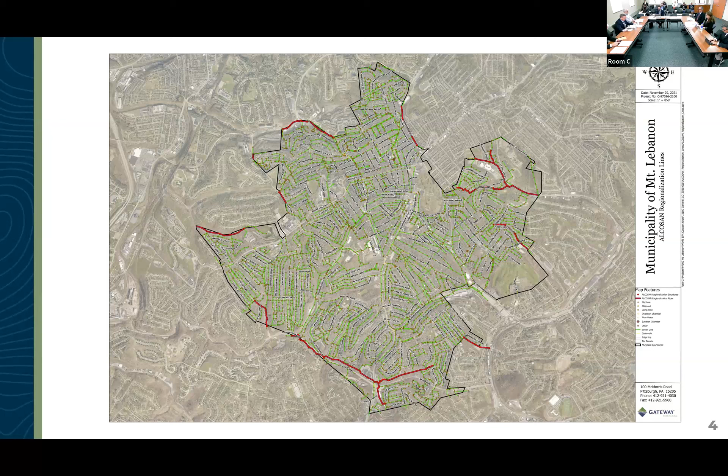So as part of the process in 2018, Alcosan performed televising of all those lines that were proposed to be transferred. At that time, they identified a number of action items to be considered for repair or to be looked at further based on their CCTV contract, in addition to what Mount Lebanon has done typically as part of their consent order and operation and maintenance plan.

Of those roughly 43 action items, there were some we were taking care of as part of operation and maintenance, and others we identified as potentially considering a different repair for. At that time, it wasn't understood whether the municipality, not just Mount Lebanon but others, would consider regionalization. So we held off on some of those repairs or remediations.

Not only that, with most of these sewers being municipal in nature, a number of these repairs or defects considered multi-municipal sewers or remote areas where it was difficult to get to. Throughout the time, Alcosan had indicated different potential repair contracts, which we evaluated versus our own contracts within Mount Lebanon, but never deemed those any more cost effective than Mount Lebanon's.

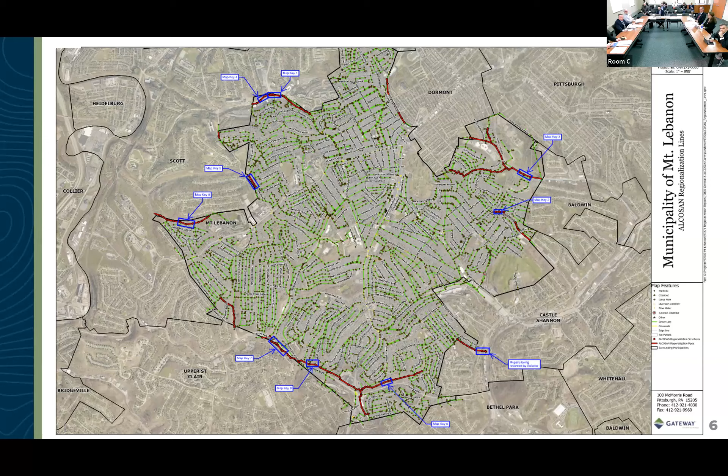So going over what has been done in the meantime, after those repairs were identified, for the most part it was evaluated how they could be incorporated within the contracts that Mount Lebanon already had for their operation and maintenance repairs. Those were developed, prepared, and provided to the contractor.

As you can see here, there's a breakdown with a number of structural repairs. Those are just the excavation repairs, and a number of spot liners or smaller liners within the system. There were some that just required cleaning and re-televising so that the data could be updated. Some were incorporated within the root treatment contract.

The manhole to manhole lining or cured-in-place lining contract, which Mount Lebanon has done a great job of, lining a significant portion of the system anyway. So it was identified that was a good potential repair to consider. And then lastly, the external point repairs, which are oftentimes even just repairs of structures.

Some of those actually remediated multiple defects that were considered. With that, mapping for each repair, cost estimates were developed for each one.

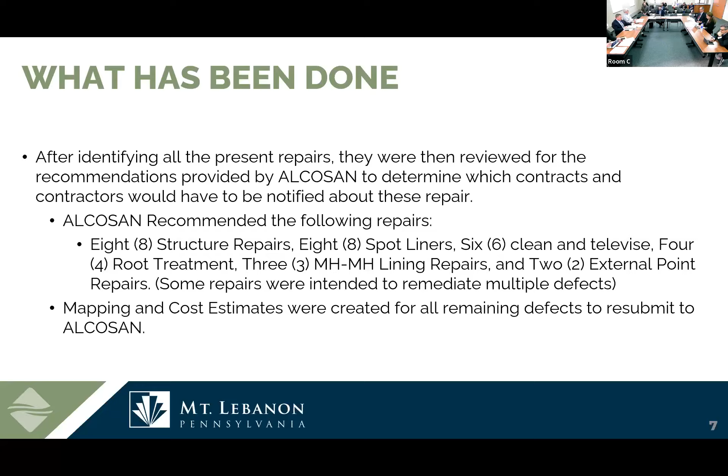As repairs were made, there was a process of resubmitting to Alcosan for consideration to have those removed from the list. The data submissions were coordinated with Alcosan. Of the initial 43, the majority have been repaired and approved by Alcosan.

As I stated, they are on active contracts, some of which Mount Lebanon has done quite a bit on. So there was a lot on those contracts, and some of them have extended over multiple years as well.

And then there were some outstanding defects found due to extenuating circumstances. As I stated earlier, one situation was in a very remote area where access was very difficult and the depth of the repair was extremely difficult. So that was one instance.

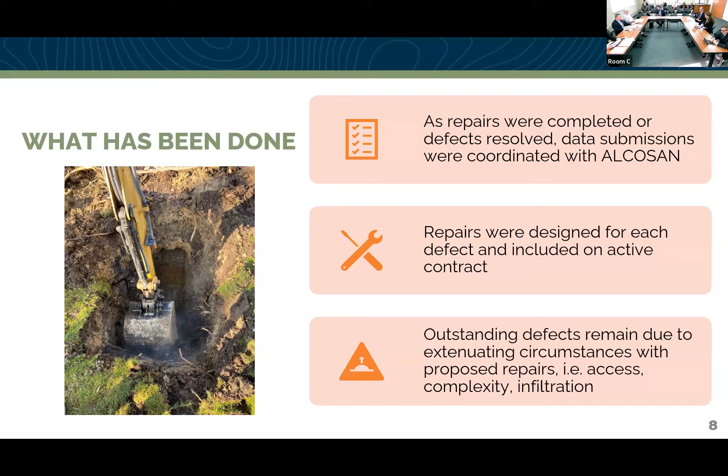Another instance was additional water coming into the line, ones that run right along streams. So there was just some additional complexity to some of these repairs.

Currently, there are approximately 14 defects or items that have been called out that are still outstanding as part of the contract. With that, Alcosan, as they've been pushing to get this accomplished a little more quickly, did include a post-closing repair and reimbursement agreement, or the PCRARA, which is a bit of a mouthful.

But it's just another way to proceed with this, as a number of municipalities have run into the same situation where repairs are either very difficult to get to or very difficult to repair. So they wanted to find a way to make agreements before these repairs were completed. In this case, and it sounded almost too good to be true as we worked back and forth with Alcosan on it, they stated that all we had to do was develop a cost estimate for each one of these outstanding repairs and provide that to them with backup information as to where that estimate came from.

And with that, it would just be a part of your final agreement that you would sign that would include those repairs. Ultimately, Mount Lebanon would just write a check for whatever that amount was, as opposed to chasing some of these repairs.

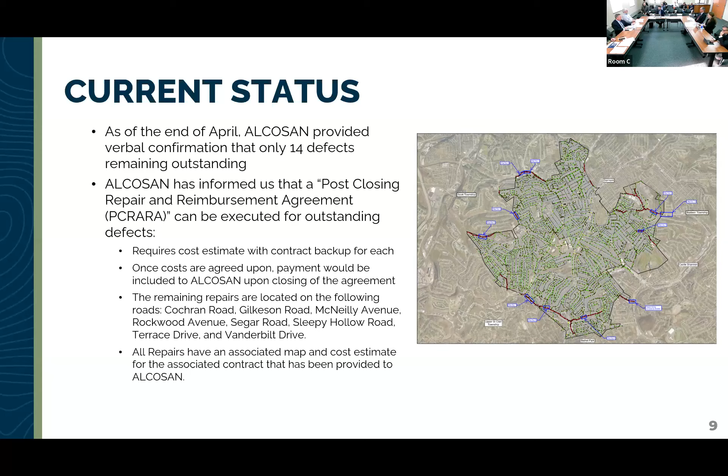So with that, the 4 active contracts we've used in order to identify those cost estimates.

I'm sorry, just to make sure - so we could write a check to Alcosan, and in theory they could say no, we're not gonna fix that? Right, we write the check. They've said this would cost to fix it. Yeah, thanks - left pocket, that's where the money goes.

Or the other option we were led to believe prior to them incorporating that, was just that we had to go and chase that repair. For instance, there's one defect under McNeilly - a defect 10 feet in from one manhole and another 10 feet in from another manhole. It's expected there's probably going to be other defects in between. It's about a 400-foot long line. Altogether, that could be potentially hundreds of thousands of dollars of repair, versus if we just repair the 2 they've identified, or provide a cost estimate for the 2 identified - it's more like a $10,000 to $15,000 cost in that case.

So those are the 2 options we have if you were to move forward - either make the repairs and chase those, or write the check and do it as part of the post-closing agreement. There's also some others where, like I said, some are just listed as to clean and re-televise.

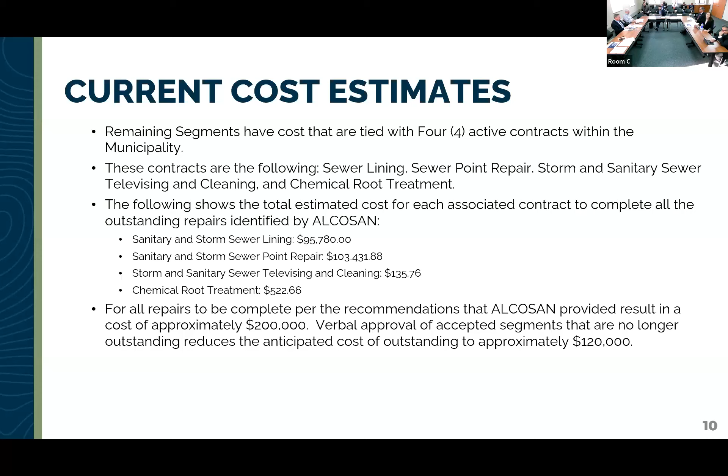Even since this was produced, I was trying not to change it too much from when I had sent it along, but it appears that number may have come down even further. We've had some discussions with Alcosan to work towards that, and they won't make any final approval or recommendations until the resolution has been passed.

That leads us into the next steps of the process. I've focused this discussion on what we've been doing for those repairs, and that's one of the main items considered along the way. But there are a series of agreements. As I stated, there were 7 points of connection, so there are seven separate agreements that would need to be made. I'll get into some of the details as to what goes into those agreements and what's required to start that process. The first of which is to execute a resolution.

They initially wanted 7 separate resolutions, and Keith had coordinated with them, and they said we could combine those all into one. That would be expected for consideration in June, right Keith? That's the current plan, yeah.

With that, once they receive that resolution, the process would start where they'd begin evaluating the permits, because they have to do a permit transfer if you go that route. They would start evaluating the easement, so there's an easement coordination that would be in there as well.

And so when it comes time for a commission to vote, you'd mentioned there's verbal... is there some number, you know, we're voting on these 7 resolutions combined into one — is there a max exposure to Mount Lebanon? Within the resolution, there's nothing that would tie you to that number one way or another. The resolution, as they stated — I think I have it here. I guess what I'm looking for is, before we vote, we should have an idea of the capped cost number.

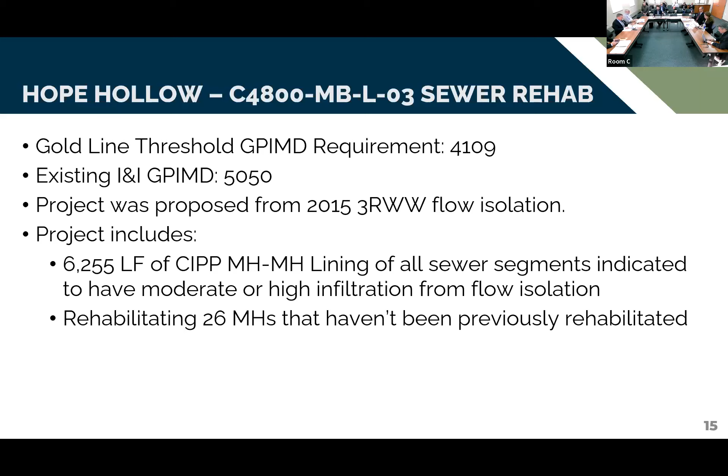I'll spare you some of the details, but essentially about this first one in the Hope Hollow area, we are currently well over the gold line standard. We're at 5,050, and that's just because of the denseness of that area. We would propose about 6,000 lineal feet of lining, 26 manholes.

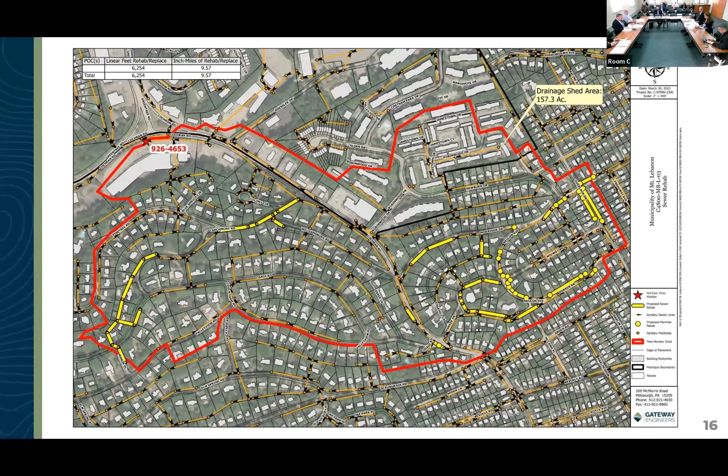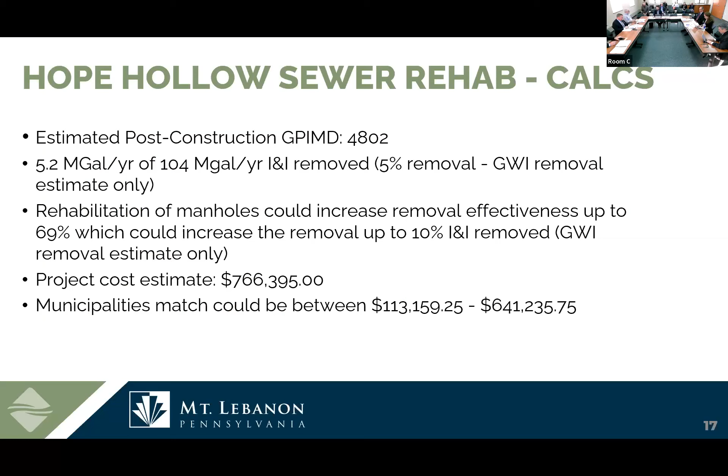Another photo showing the region and the proposed lining area extents. Ultimately, in just preliminary calculations, at the very least a 5% removal, but with the manhole repairs we're expecting that to be somewhere right around the 10% I&I removal required by the order. The total project is estimated around 800,000, with that wide range of costs.

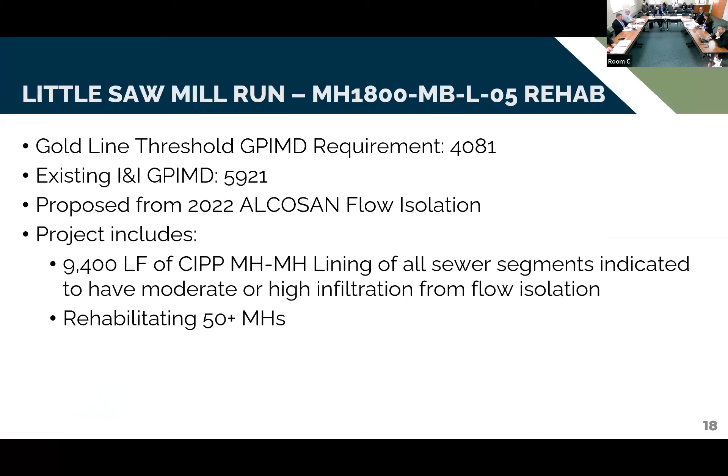The other area is Little Sawmill Run. That one, as of right now, is a larger lining project, about 9,400 lineal feet of lining with approximately 50 manholes rehabilitated within that.

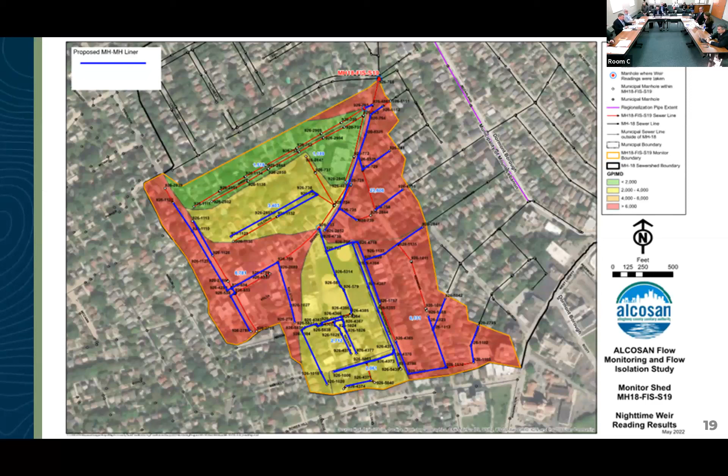Map showing the previous study that had been completed to identify areas to be considered. That would get us right around to that 9%, or once we complete our final calculations, we would hope to reach that 10% removal that's required by the order.

Commissioner, any questions? So following that trunk transfer, portions of it are part of an ordinance. So we're still required to comply with the consent order, even though it would be transferring. So those are lateral lines, that's the lateral part, but there is a portion of that that's part of the transfer. Yes, there are a few different portions actually that would be covered with the transfer.

I think both these projects are ones we would do anyway, right? Dennis recommended, yeah, for our gold line standard. So they're good projects because we could potentially get grant money to comply with the order, meeting the gold line standard. We've been pushing toward essentially manhole to manhole lining as much of the system as we can, to get the 70 to 100-year-old system up to date. These are projects you would recommend anyway to bring us in compliance with consent order requirements. This is just an opportunity to get some funds to offset the costs.

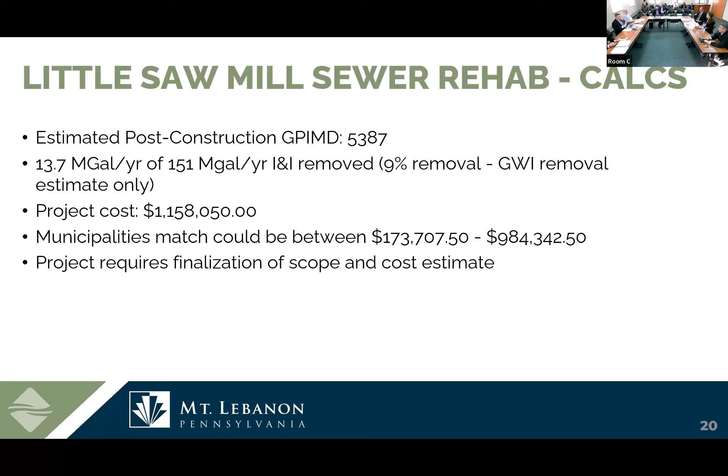We're a little bit ahead of schedule still in identifying some of these, so trying to take that bite of the apple before everybody else is chomping at it. Any other questions? So we are ahead of schedule. But thank you, we appreciate it, Dennis.

As we continue Gateway Engineers night, next is Cedar Boulevard, Salem, Hollycrest intersection, and Mike Haberman is joining us.

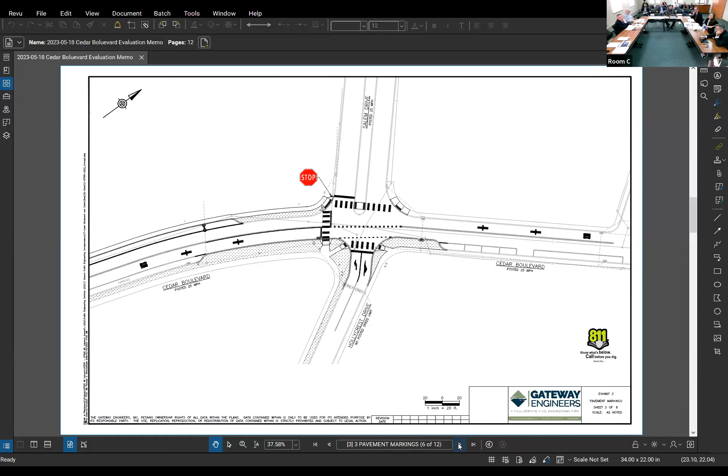The potential improvements build upon each other. This first one shows the narrowing of Cedar Boulevard with curb lines to minimize the length of the crossing, and bringing the Hollycrest approach up at more of a 90-degree angle to define things a bit more. This superimposes the new markings on that scenario with the new curb bump outs. The final build on top would be to install RRFBs - push button powered rapid flashing lights actuated when a pedestrian is going to cross Cedar Boulevard at that intersection. That's all what we talked about last time.

Yeah, what about more of this? What about that? So we're gonna talk about it a little bit. Just to touch on the first one - the next exhibit asks if there's something that can be done in the short term, temporary but could be permanent, requiring maintenance over time, to create that same situation without the massive infrastructure. Something cheaper and faster that we can do soon. Exactly.

This exhibit shows creating that exact same situation - the bump out areas where you already can't park, getting the 90-degree angle on Hollycrest, enhanced pavement markings leading up to the intersection with legends on the road, tracers through the middle of the intersection, yield lines at the crosswalk. So it's all pavement markings, all lines, no moving concrete, no curb cuts, and no physical barriers. It's all visual pavement marking.

But I thought you said it also included maybe some physical bump outs. That was the other one, the first one. This is doing the same thing simply through pavement markings - the temporary one is just like a stopgap. So I saw the hash marks and thought that was physical. Yeah.

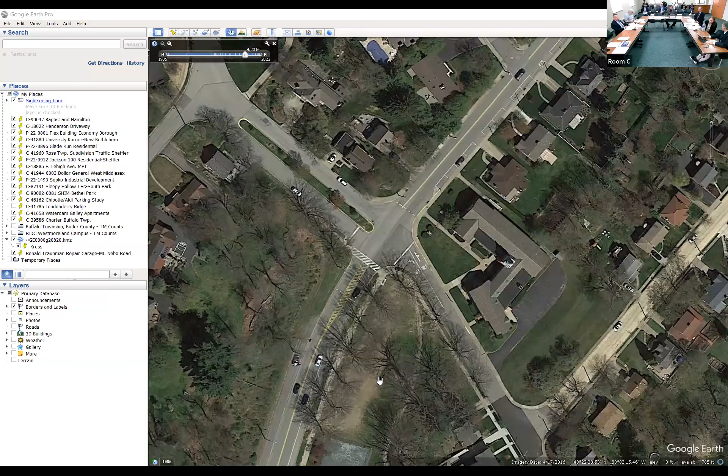This is the sidewalk network within the tennis complex. It peels off to these courts, goes north of those tennis courts, and comes back to some of the other courts. The exhibit shows where this sidewalk peels away from the existing sidewalk.

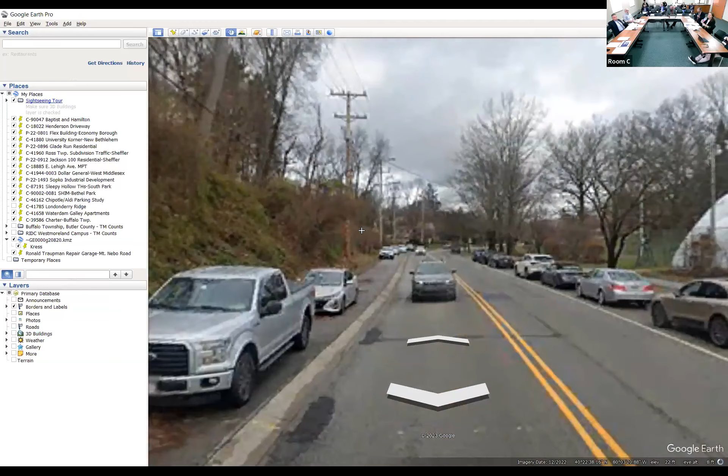If I were to drop myself in— go ahead, interrupt you for a second. Sorry, no, I just— it's okay, sorry. You show me something, we'll stop talking. If I pull up your street view.

This was put in presumably by the municipality. This is the location where asphalt was put in, probably because folks who were parking over on the asphalt parking lane were making their way here, since this connection provided access to all the different tennis courts within the complex.

So that is where the exhibit showing the mid-block crossing would be. Share that back again. You have two proposals: one at grade for 3,500, and if it's raised, 20,000. Yeah, it would essentially be an enhanced speed hump, but a speed table with a crosswalk on it, so you'd have the same ramps as a speed hump, but instead of just a parabola, it ramps up and has a plateau marked for the crosswalk.

So with crosswalk and speed hump, you did two options for that. Correct, this is the exact same exhibit. It would have the signs for the pedestrian crossing, and we would want to restrict parking.

You don't want parking 50 feet on each side, so that you have visibility if you're a car or a pedestrian about to cross. That's my only concern—safe visibility crossing between parked cars on both sides. You'd have to restrict parking for at least 50 feet. Yeah, that's essentially what we're doing there.

You lose how many spaces? You'd lose two on each side, so four.

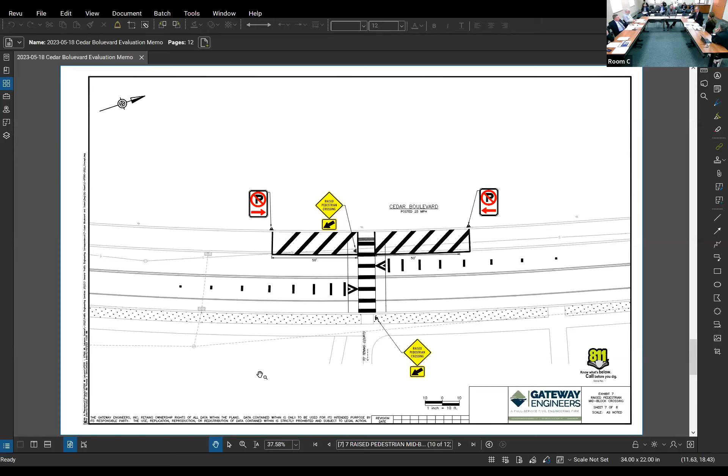Part of any crash history is looking at why the crash occurred. You have 3 rear-ends because somebody was on their phone - there's nothing you can do, the signal's not gonna change that. And then the volume thresholds aren't met either.

There's a 1-hour threshold, a 4-hour threshold, an 8-hour threshold - none of those are met. It's everything, every approach, every pedestrian, everything.

But last time we chatted, didn't you say that just the fact of having that crosswalk there actually increases the likelihood of an accident? It's not that it increases it - what the studies have shown is that a marked crosswalk can give the pedestrian a false sense of security, mid-block, if that makes sense.

It doesn't mean it doesn't make sense - like out here on Washington Road at the elementary school, that by all means is an absolutely necessary mid-block crossing. It makes sense where it is. It's been enhanced with a lot of the stuff we're talking about here, with signage and pavement marking and everything else. So the idea is if you are going to encourage people to cross a particular location, you want to make sure you mark it and sign it so that motorists and everybody else using the system are aware of it as they approach and go through it, as opposed to coming upon it and not really being sure what's happening. So all this is meant to enhance awareness for the pedestrian and the motorist, whatever option, if any, is pursued.

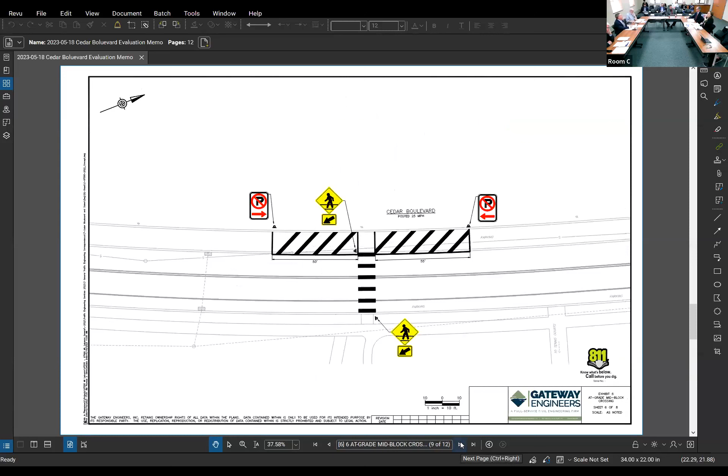I'd like to put that raised mid-block crossing in that same category, like the $20,000. Yeah, I don't mind having the cost of it and looking at it in the scope of the whole budget.

But just looking at where it is — I'm down there every night except when it rains, and games aren't canceled much on turf — I was hoping we could do something more significant mid-block to ease the speed coming into that intersection. It's a pretty good stretch, and even after that mid-block, where that extra stretch of concrete is, there's more than enough room for people to get up speed again, which they do.

By the time they get to that Salem Holly Crest intersection, you think they'll accelerate that quickly after going up to speed? I hope they're not gunning it that significantly. I'll just say, I go 25 miles an hour and people back up behind me.

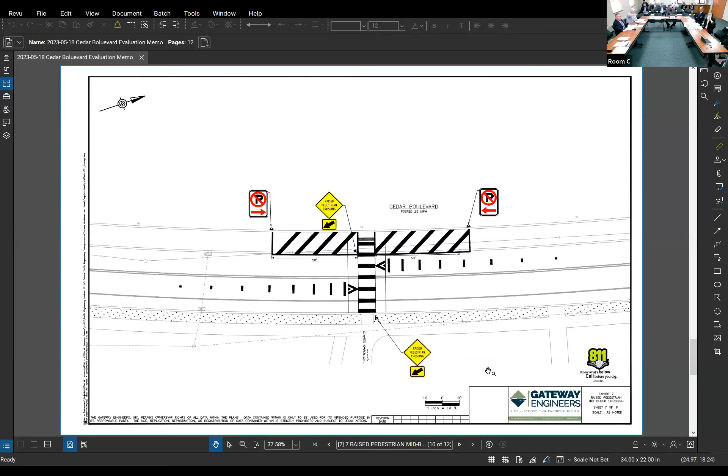Then we have... but coming the other way, what I'm saying is, to the point of, from this section here — can you go to the drawing, the one that has everything?

I was hoping it wasn't as much room looking on the map, Steve, but it is a good amount of room. So the distance — this line up here matches the line down at the bottom — so it's got a pretty good distance.

Mike, my other question is, how much do you actually think people would use a mid-block crosswalk there? Because if they're not parking proximate to that crosswalk, are they really going to walk all the way to it?

I think you'd have to turn it into a full-blown sidewalk on the other side, and make it obvious where you need to cross, because people are crossing all over the place now. That's why I'm asking the question — I don't know if this would change that behavior without the sidewalk.

I agree. I think you need that sidewalk to basically tell you when and where, and maybe even another light that would signal that you're crossing here. That's a lot of money, though.

It'd be cheaper to get the flashing light here — say $20,000 for the raised crossing and $50,000 for the flashing light — rather than almost $1 million for a sidewalk. I just don't think the cheaper version engenders the behavior change we're wanting.

I think we'd want to get a handle on how people are crossing now. My intuition is that wherever somebody parks, they get out of their car and cross, all over. That's what I'd think, because there's no sidewalk behind them, and you're not really going to walk — you'd have to walk up Cedar Boulevard in the lane of traffic to get to this location.

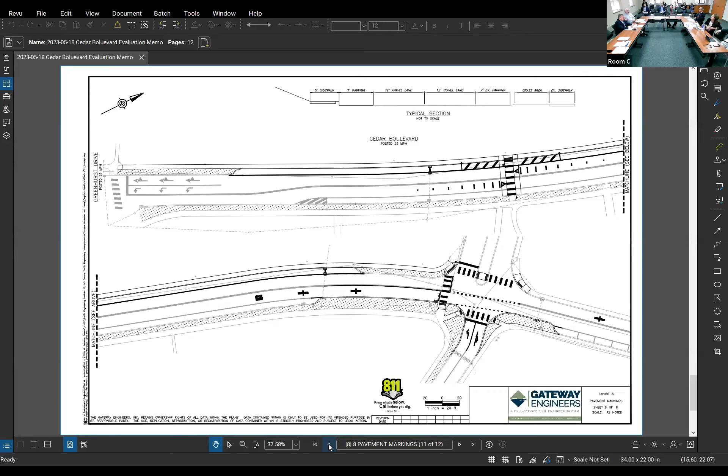So as far as direction for staff, yes, we want to come back to talking about unassigned funds, but clearly this seems to be pretty high up the list of something we want. So let's try to get that unassigned funds discussion quickly onto a future agenda so we get this project moving.

Yeah, after we talk we just want to put everything towards sidewalks, unassigned funds. I don't know if that'll fit on the 13th, it'll have to be in early July, but yes, let's bring that back for us to talk about.

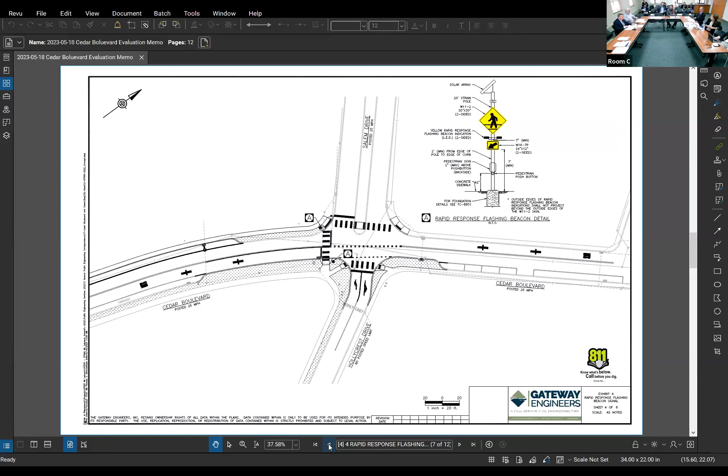We're short on time. Is there anything else on this subject right now? If not, I want to get to the next thing on the list. Cool with this? I think that's good to move forward. We'll hit it at unassigned funds and then maybe budget season if we don't get it through. That's what residents are gonna want to know. When are we gonna do it?

Well, I'll back to look at the discussion session, see when the unassigned fund meeting will occur. Don't have a date yet. We'll talk and figure out. We may have to move some stuff around for priority. We have a few things, and I know we've already committed to the sidewalk discussion on the 13th. So we'll see if it fits in there.

The second meeting in June, we're really gonna have to talk about the solid waste contract so that we get that information out. But we'll try to get the unassigned fund discussion in, as Steve said, if it fits one of the meetings in June. If not, we'll get it in the first meeting in July because we don't have a second meeting in July. Even if we do it in 2 parts, if that's how we have to do it.

Put the Holly Crest thing on for the sidewalk discussions. When we shoot that down, we'll be more inclined to go forward with the sidewalk stuff. We're not shooting it down.

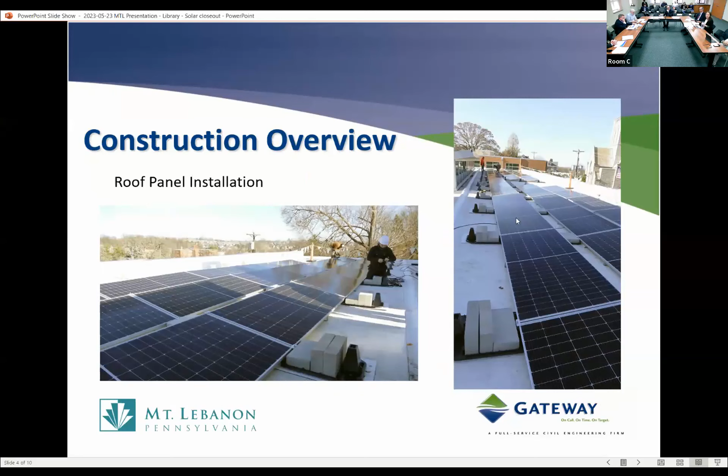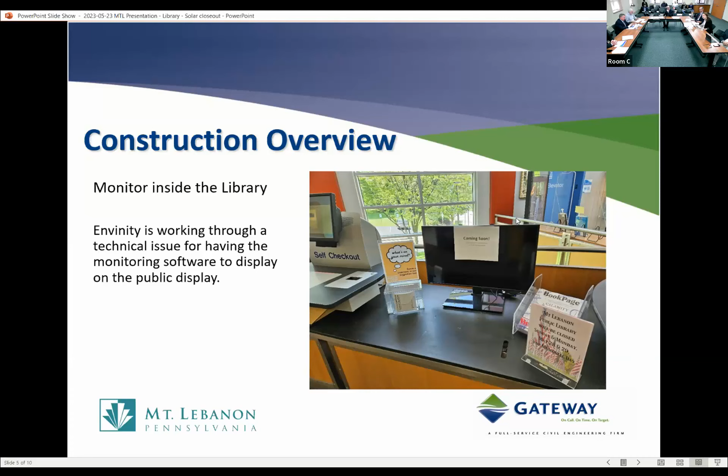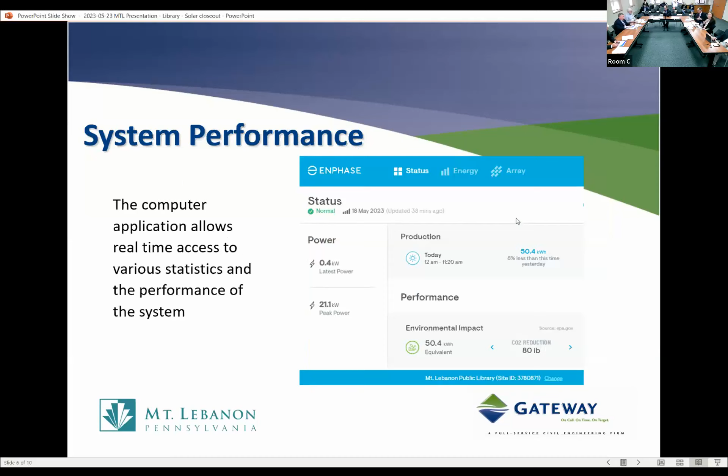This is the monitor that will be on display. It's actually there in the library, just waiting to get operated on. And then we actually get into the system production. This is what the computer can display, so it can give you real-time information on the system. Gives you some performance stats, actually carbon reduction is noted on there. Kind of cool.

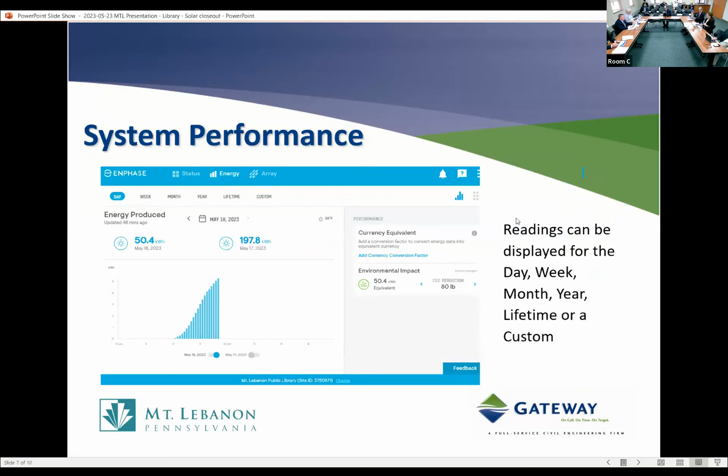It gives you the amount of energy produced in a day, and then it also sums it up for the month, whatever's there. And what we're seeing out of the system is in the first two months, we've gotten 3.5 megawatt, or kilowatt hours. And then the second month is about 4. So the system is performing as we expected with 30 kilowatts.

And if you look at the equivalent of what it's producing, it's not enough to power the whole library, but it's performing like probably the equivalent of at least a couple houses. So it is providing a benefit to the library, it's just not able to power the whole thing. The payback based upon this was still about 30 years.

To pay it back, we knew that from the beginning, it wasn't going to be a payback on the system. It was more of a demonstration project. So it's operating as planned.

The step to make sure the panels get cleaned, that's really the only thing you have to do with them. And a couple of things that we learned.

Actually we thought we were gonna have a problem with Duquesne Light, then they came around and provided what they needed to give us the proper connection back to their system. So the best thing that we learned was we really needed to do a little more due diligence related to the building's electrical service and how that interacts with the solar system and how it gets put back onto the grid when you're working with an older type of building that already has established service.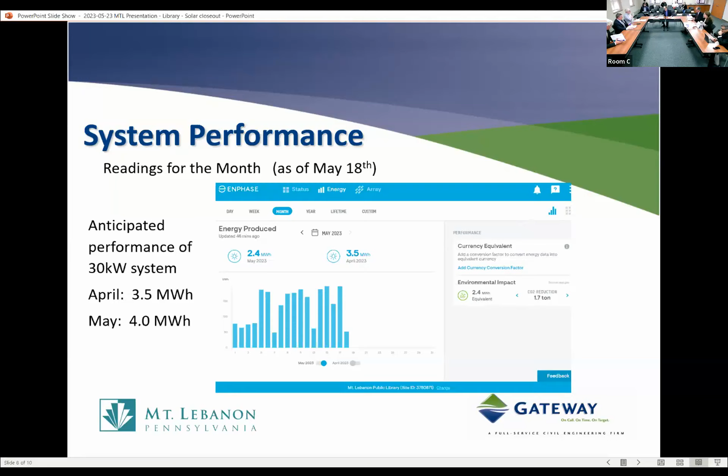Boards and authorities, we've got about 2 minutes. Anybody got anything, school board stuff? Please. Budget passed last night, an increase of 1.2 mils on the tax side, of a budget around 115.

Pension Advisory Board met, continues to perform well, we are well funded, investment strategy is robust. Nothing really to report, they're doing a great job. All right, okay, that's it.